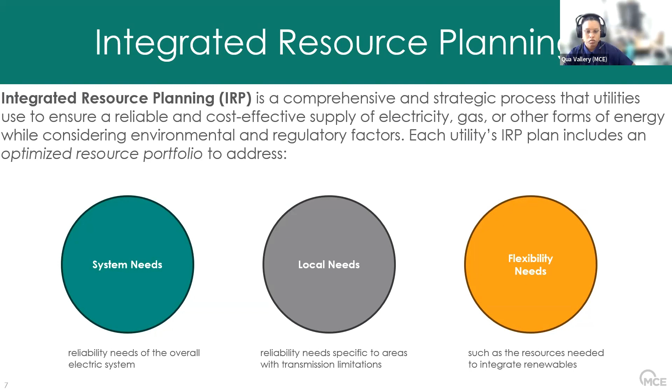So when the utilities are thinking about this optimized resource portfolio in the integrated resource plan to meet energy demand and grid needs, this is a little bit of an oversimplification, but a utility really has only two options. Either they reduce energy demand via energy efficiency practices, or they procure more energy.

So while energy efficiency and energy procurement are distinct concepts, they are often considered two sides of the same coin because they both contribute to achieving a more sustainable and cost-effective energy system. And by addressing both aspects, utilities can optimize that resource portfolio for the energy usage for their service area and procurement practices.

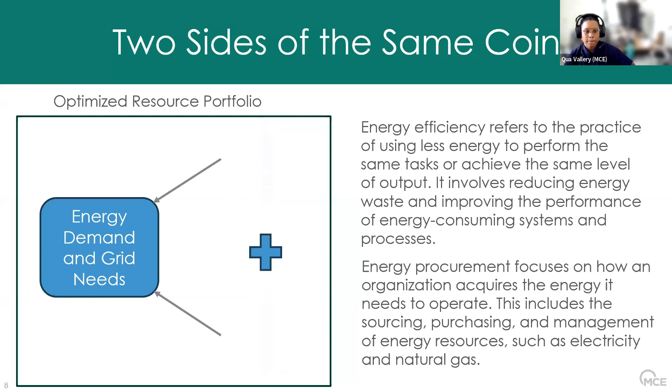And here's just a main takeaway to summarize those previous slides, which is energy efficiency reduces demand and therefore reduces the need for a utility to procure additional energy resources, which often comes at a higher price. Next slide.

So with integrated resource planning in mind and how EE plays a role in that planning process, I wanted to talk about how EE has changed over time. Prior to SB 350, EE was primarily thought of as just a tool to reduce energy demand cost effectively. And that's still the case to this day. We still think of it in that way, but it has evolved into so much more. And I wanted to give a few examples of that.

So the first thing is grid reliability. EE reduces the overall demand on the power grid by using energy more efficiently. And so the need to generate and transmit that energy is reduced, and there's less strain on the infrastructure and transmission lines. And during peak demand periods, such as hot summer days, when everyone's using their ACs, the grid can become overloaded. And it's the energy efficient appliances that homeowners and buildings have that reduce that peak demand at that point in time to prevent blackouts and brownouts.

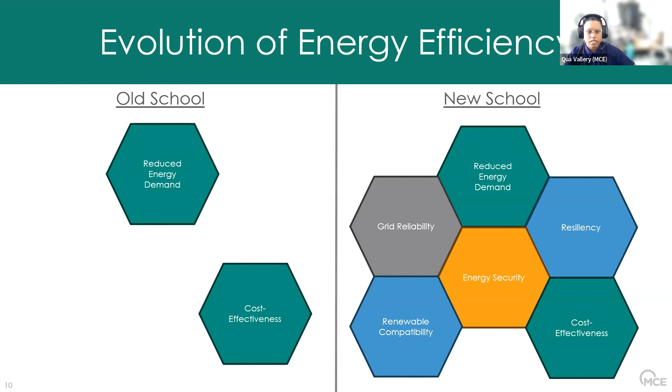So basically, to summarize, EE has evolved beyond its conventional role and is a vital tool for decarbonization and serves as the backbone in balancing the evolution of the grid.

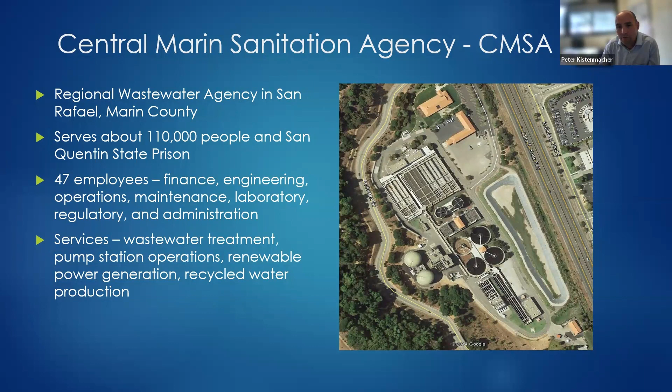The core of our activities is wastewater treatment. So it's sort of everything you see in that picture on the right-hand side. And that includes the renewable power generation complex. And we do a little bit of pump station maintenance on a contract basis for smaller entities. And then we produce a relatively small amount of recycled water as well. Next slide, please.

So the basics of organic waste to energy, it's quite simple. We start on the left-hand side with the organic waste, which is food scraps, discarded food waste, as well as what we call FOG, fats, oils, and greases. So these are liquids that are pumped out of like a McDonald's or a restaurant that separately collects the grease. They put those in tanker trucks and they arrive at our facility. And then, of course, we also process the wastewater solids that come down the pipe.

And the core of the process for us is called anaerobic digestion. It's probably a 100-year-old technology. It's well established, and it just mixes all those feedstocks together, goes through a process and produces something called biogas. Another name for it is renewable natural gas. It has a high methane content. It's good energy value.

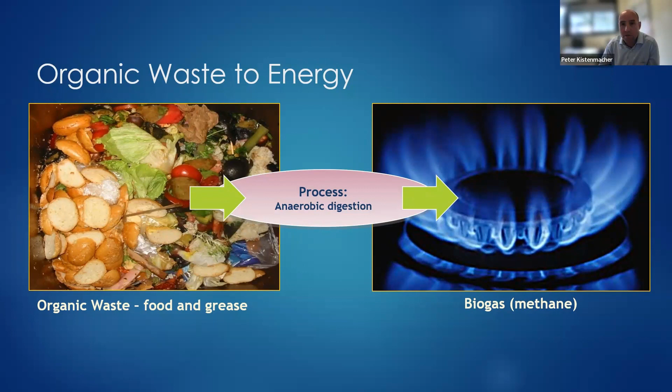For your background, it's more contaminated and less energy dense than natural gas. It has about half of the BTU per cubic foot and a lot more contaminants, but it is still a good fuel source that we can turn into energy. Next slide, please.

This is more of a schematic of the bigger picture. So everything starts on the left-hand side here with the collection of the organic waste. This is an activity that our partner completes, Marin Sanitary. The food is collected in these bins. It is put onto trucks and it is brought to their transfer station, which is that second area on the bottom left. We are very fortunate that Marin Sanitary Service has a transfer station about half a mile up the road from us. So that is a key component of our partnership.

They process the material a little bit further and remove contaminants, which is a very important point. Then it gets trucked to us and injected into our anaerobic digesters along with the wastewater solids. It spends about 40 to 50 days in there in the dark in the absence of oxygen, and these naturally occurring bacteria produce the renewable natural gas. We then have an engine generator, internal combustion technology, that produces power as well as heat.

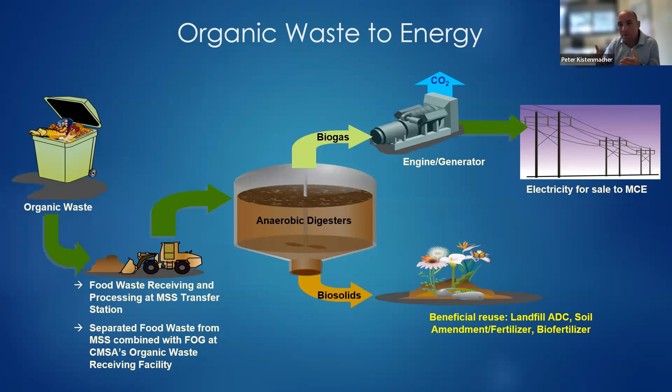So at this time, I'm happy to say we produce about 100% of our own power needs, as well as 100% of our own heating needs. And certain times of the week, we're able to sell excess power into the grid under an existing agreement with MCE. Next slide, please.

So why are we doing this? We think there's a lot of benefits to this. Some of them include that we're making our own power. In general, a wastewater treatment plant is one of the largest, if not the largest, power consumer in a community.

We have lots of processes going on here, big pumps, blowers, and the like, and we just use a large amount of power. And if we had to purchase that power off the grid, it would be several $1 million a year in power costs. So the ability to make our own power is great from a financial perspective.

The ability to potentially make a little bit of revenue from the sale is interesting. And it's also more efficient because we don't have to buy power, say from solar power in the Central Valley or somewhere far away that has to be transmitted to us, and then you deal with the losses along the way. So we make the power, we use it right here, and we sell it to the local community into the grid.

The other key aspect here is the organic waste, and that is a complex topic, and it's really coming from the solid waste sector. So traditionally, we, the wastewater treatment plants, have not interacted much with the solid waste sector. Those lines are coming together more and more, and the solid waste sector is being driven by CalRecycle, which is the state governing body.

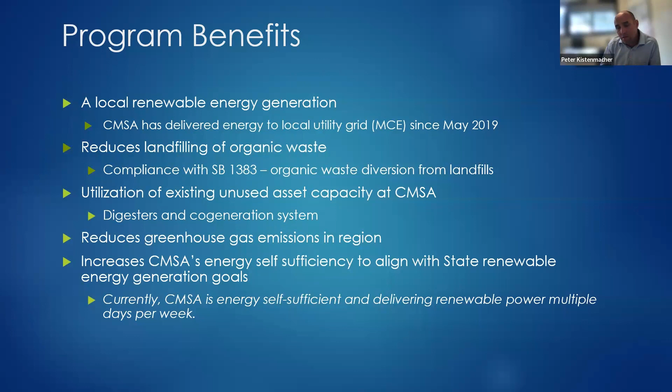I think there's a lot of greenhouse gas benefits across the region. You're not sending big trucks of food waste to landfills that are far away. And as I mentioned earlier, it really helps us be energy self-sufficient. And then any extra energy we can deliver to the grid, to MCE.

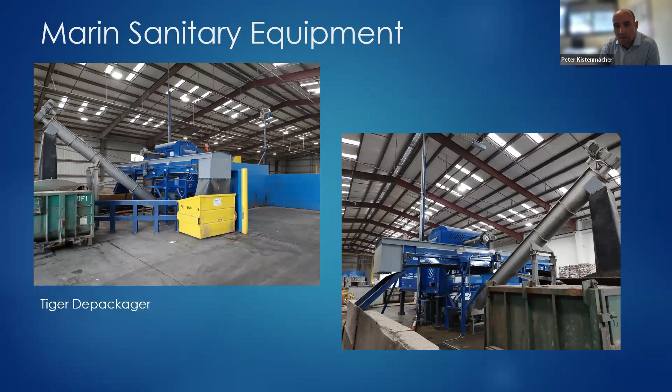Marin Sanitary just invested in this particular unit here. It's called a Tiger depackager. It's working really well. It produces a clean feedstock at the end, and all the contaminants stay on their site. Next slide, please. So then we go to CMSA. This is our receiving station.

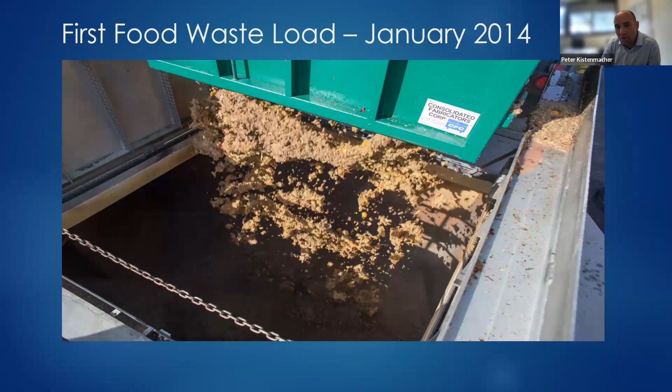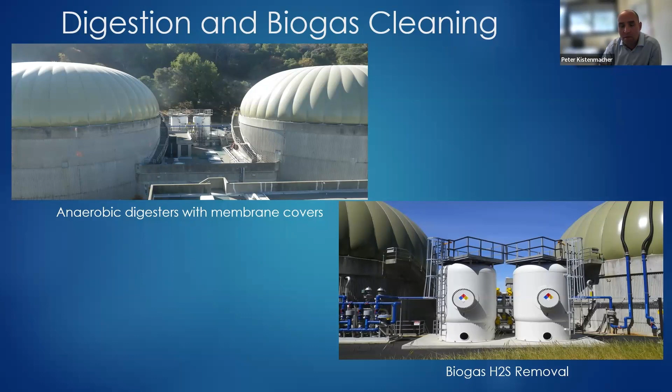Next slide. And then here's our power generation unit. The top right, the green unit, that's the heart of our power plant. That produces up to 1 megawatt of green energy. On a typical day, we use about 600 kW, and that leaves the rest of it, say 400 kW, for sale into the grid, into MCE, if we have enough biogas.

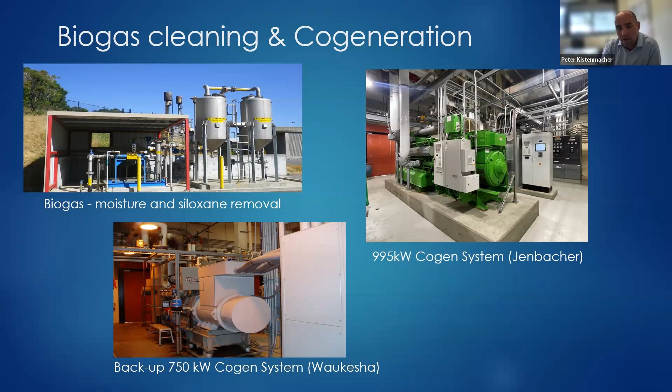And now what we're spending a lot of time on is getting more feedstocks into our facilities so we can have more biogas to sell into the grid. Next slide, please. Next, please.

I'll just briefly touch on this, but there's a ton of electrical engineering that goes into making all this work. Relays, PG&E interconnection. This took several years to work through, and it's quite expensive, but it is working now, and it's working great. And just something, as you think through doing that yourself, you will have to invest into upgrading your electrical infrastructure to allow power to flow both ways, into your facility and out to the grid.

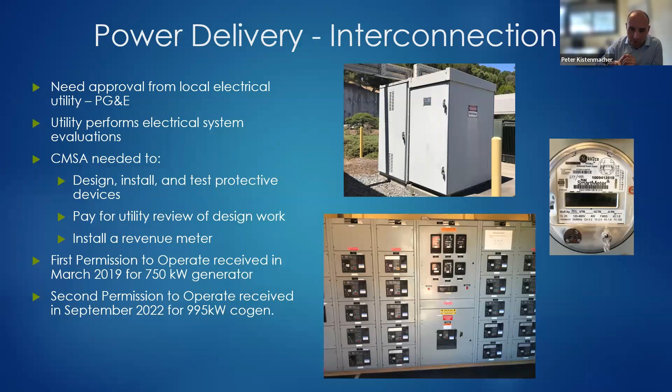Next slide, please. And just wrapping it up, I think what we're also fortunate to have is this 10-year power purchase agreement with MCE, where they're agreeing to purchase any extra power that we make. They're paying us currently about 8.5 cents a kilowatt hour for that power.

It's a very nice agreement in that it has a lot of flexibility for us. There are no minimum delivery requirements or firm commitments, and the invoicing part of it and getting paid is working seamlessly. It's been a really great experience. Next slide.

So I think I'm out of time, but this is just to give you a sense that none of this happened overnight. We're really looking at at least 10 years of sequential work that happened, starting with constructing infrastructure, entering and negotiating agreements with PG&E, with MCE, with the feedstock suppliers. We did a lot of studies to help us optimize the system.

And just recently, we won a $2.5 million grant from CalRecycle to expand the facility. So we're sort of looking out, how can we expand this? How can we bring in more material? How can we produce more power that we can sell to MCE? I think I'll wrap it up there.